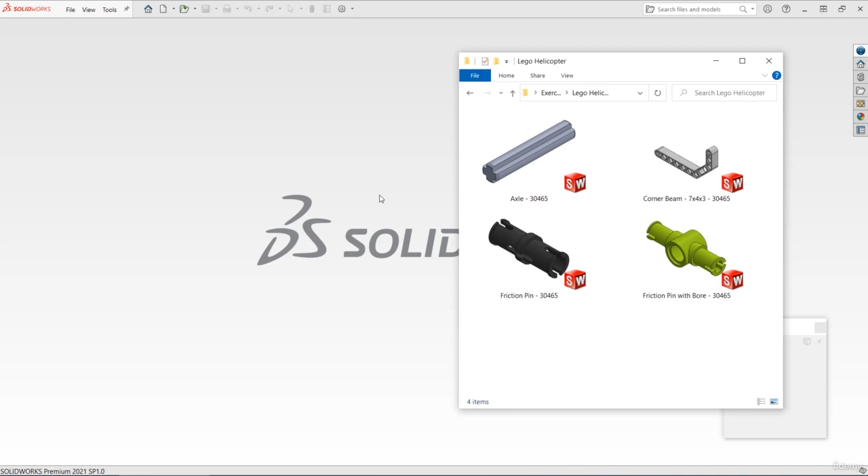Now that we've created those first 4 parts, we can use them to make an assembly of the actual Lego helicopter. The first thing we need to do is make sure we've got all 4 of those parts open. You can either drag them into SolidWorks, or open them normally. Once your parts are open, you can switch between your open windows by pressing Ctrl and Tab. So you see we've got all 4 of them open.

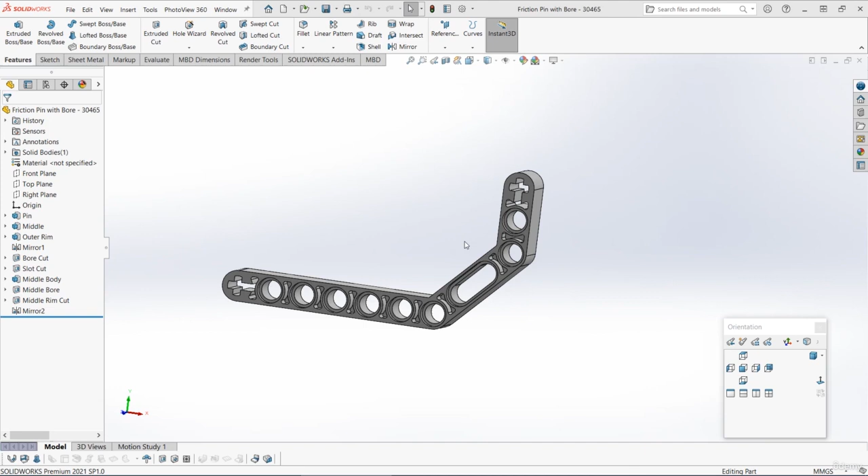Before we actually start making the assembly, we need to think about which part we're going to start with. You might think the best one to start with is this large side part of the fuselage, the large right angle beam. But if we look ahead in the instructions, we can see that this green connector is right at the center of the model, so it's probably best if we line that up with the center of the assembly. This will help us later if we need to mirror any parts over to the other side.

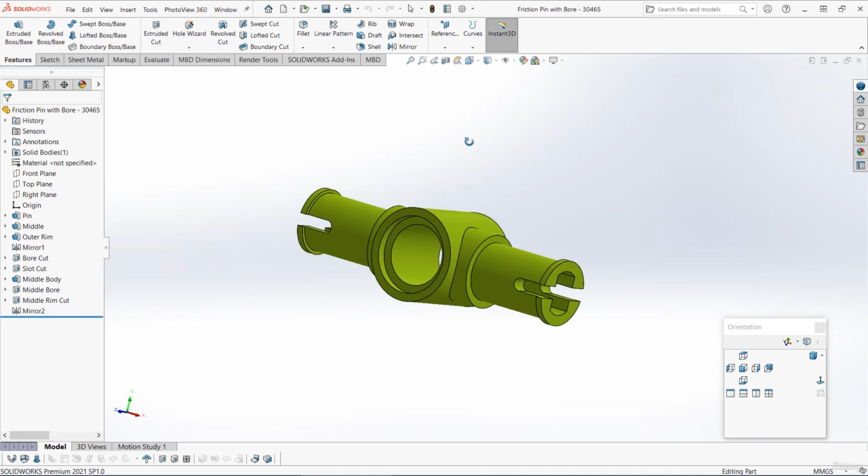So go to this green friction pin with bore part, and from within that part, go to File, Make Assembly from Part. We're now taken to an empty blank assembly, and you should see your 4 open documents here on the left. These are just parts that are open in SolidWorks.

If you don't see your parts there, you can just click Browse here at the bottom, and you can find the parts wherever they're saved on your computer.

First we need to select the part that we want, which is the friction pin with bore. Left click to select that, and then go down a little bit and select Graphics Preview here. This means that when we move the mouse into the graphics area, we'll be able to see that part following the mouse around and see where it will be positioned.

Now let's make sure the part is rotated to the correct orientation. You should see this small rotate menu, and you can use these buttons to rotate your part by 90 degrees in different directions. If you don't see that menu, scroll down a little bit and make sure you have a check mark in the box, Show Rotate Context Toolbar.

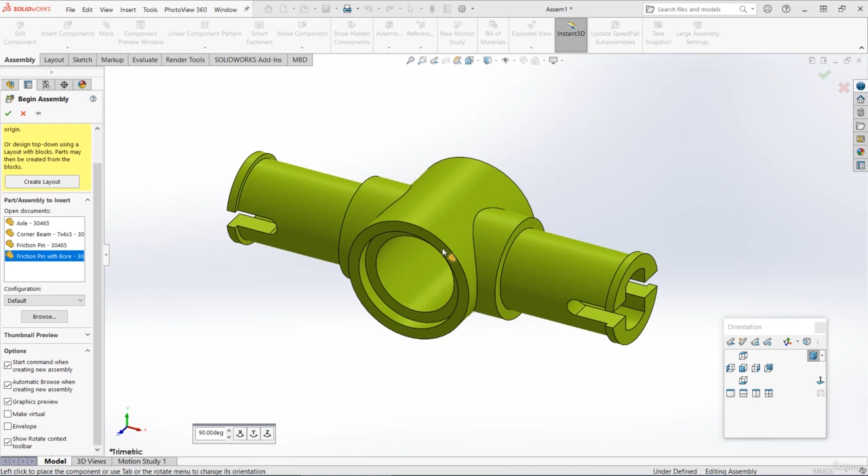Let's rotate the part around so it matches the orientation in the Lego instructions. We want this hole through the middle to be pointing directly upwards instead of forwards. So we want to rotate around the X-axis, so I'll click this X button, and now that hole is facing directly upwards. Then let's place this part anywhere in the graphics area by left clicking.

This part is now inserted into the assembly, and we can see that it's fixed because there's a small F in brackets next to the part in the parts tree. Also, if we try to drag the part around, we get a small message saying the component's fixed and it can't be moved.

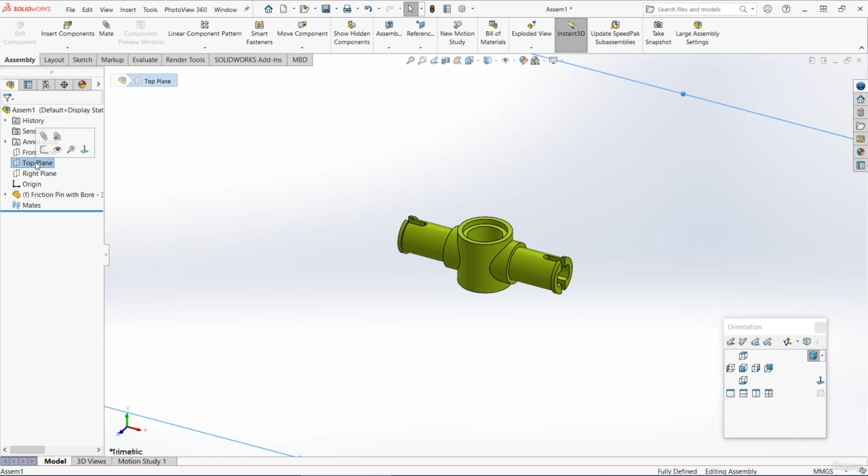However, if we go to a top view and look at the default planes, we can actually see that the right plane isn't lined up with the middle of the part. So this isn't really what we want. We need to make it so this part is free to move around, and then we can put it in the right place and fix it there.

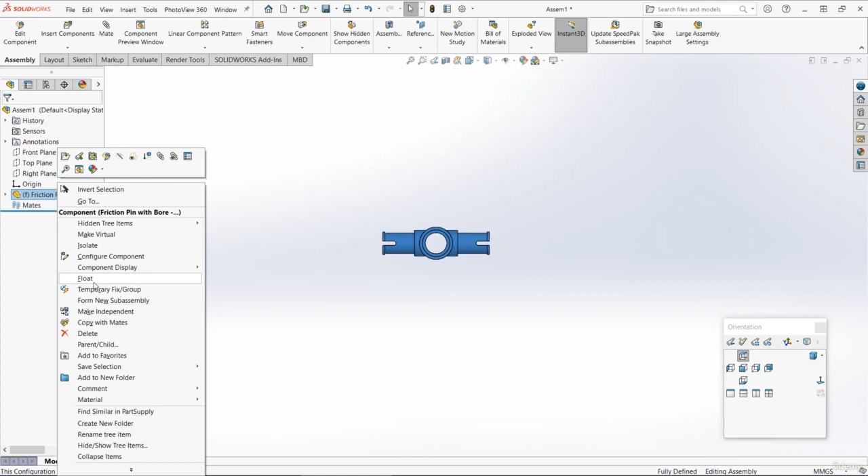To do this, first go over to the friction pin part with bore on the left and right click on the part, and from the menu choose Float. This will unfix the part so we can now move it around, and we can see that F for fixed has disappeared from next to the part name, and it's now replaced by a minus, which means the part isn't fixed. We can now expand the part and line up the planes from the part with the planes from the assembly.

Let's start off with the front plane from the part, so select the front plane, and then hover over the default planes in the assembly, and there should be one that's roughly lined up with that front plane. In my case, it's the top plane.

If we hold down Control, we can select both of those planes, the front plane from the part and the top plane from the assembly. Then if you release Control, we can add a coincident mate, and that will line those 2 planes up. Then let's choose the next one, the top plane in the part, and then hold down Control and select the

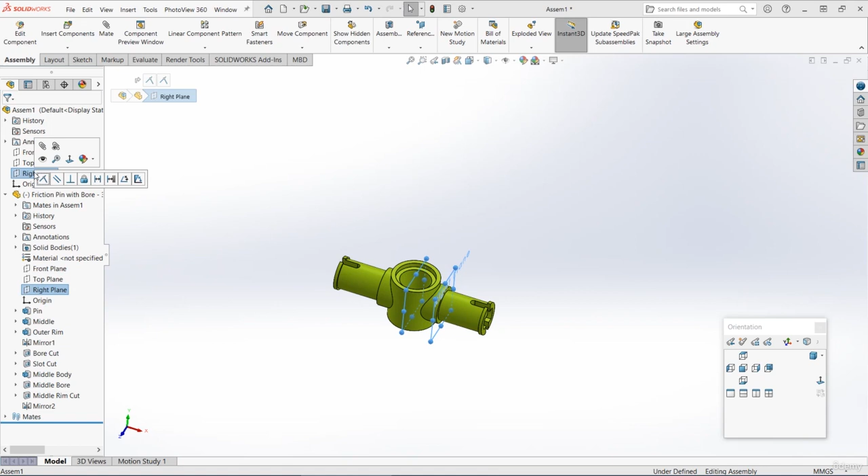front plane in the assembly, and then release Control and add another coincident mate. Finally, let's do the same with the right plane in the part and the right plane in the assembly. Now we can see that we no longer have that minus symbol next to the part name, so now it is fully defined, and we can also see it says fully defined down here on the right. And now if we go to top view, we can see we've got the right plane of the assembly at the middle of that part. So this will just make things much easier if we need to mirror over any parts from one side of

the chopper to the other side. Now that we've fixed that first part in place, let's insert the remaining 3 parts.

You can do this by going to the Assembly tab and choosing Insert Components. We can see we've got those other parts open there. Again, if you don't have them there, you can click Browse and just find them on your computer. Now before I insert the parts, I'm just going to click on this pin icon here. This just pins this menu open, so it means we don't have to reopen it every time we want to

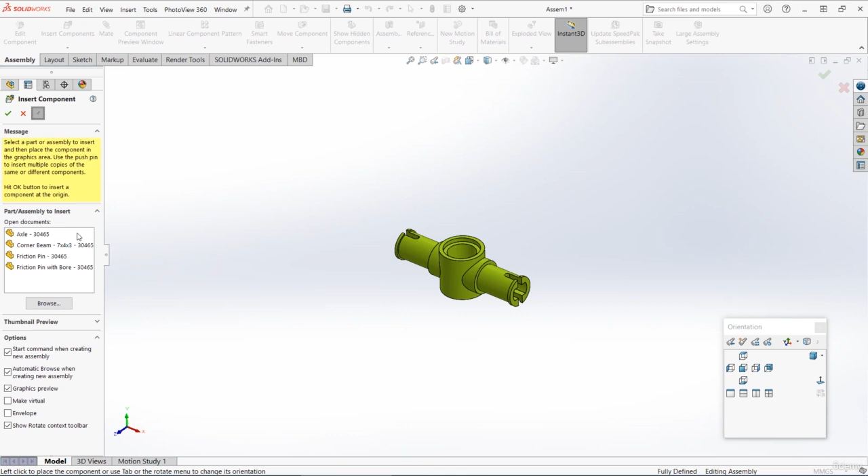insert a new part. So firstly, I'm going to insert the axle part, and I'm going to use those rotation buttons to just rotate it around to the correct orientation so it lines up with the Lego instructions, and then I'm going to left click to place it in roughly the correct position. You don't have to rotate it at this stage, it just makes things a little bit easier when we add

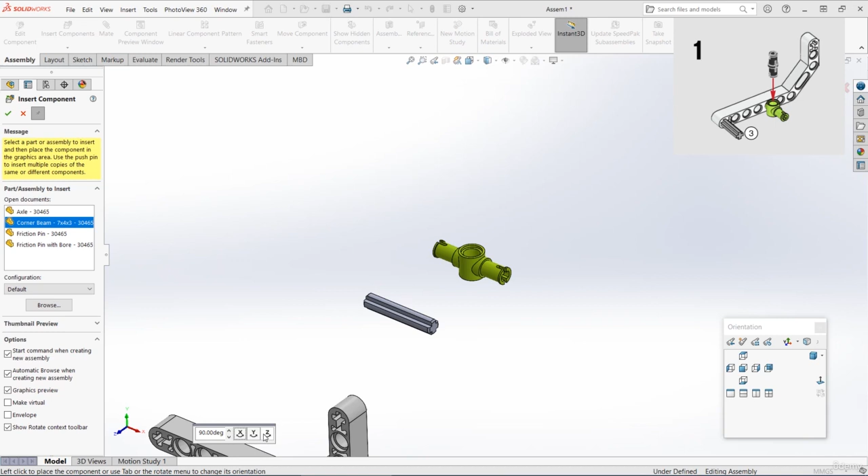the mates later on. The next part I'm going to insert is that corner beam, and again I'm going to rotate it around to the correct orientation and then place it in roughly the correct place. And then finally I'm going to add the friction pin, and again rotate it around so it's in the correct orientation. And then when you're done, you can press OK to close that Insert Components menu.

Now we can see we've got all the parts that we need in the assembly. The only one that's fixed is the green one. The other 3 parts have all got a small minus next to them in the parts tree, and that just shows that they're not defined and we can move them around in space.

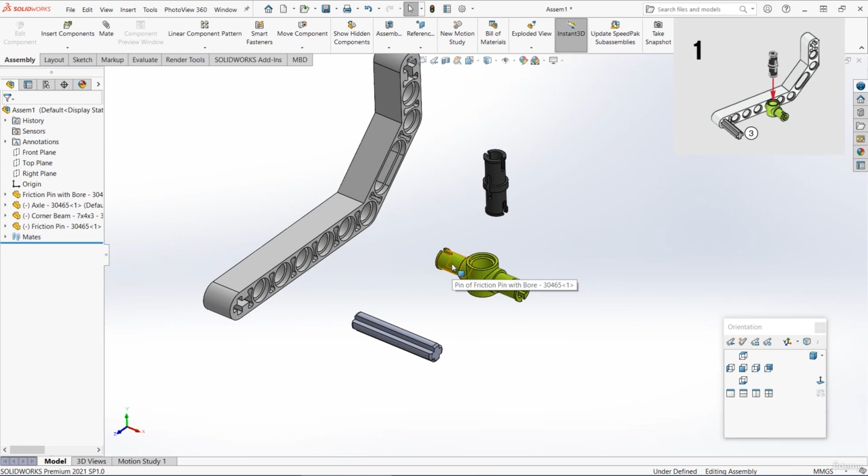Now we can start to add some mates to fully define those other parts in the assembly. With Lego, it is fairly easy to see how parts fit together, so the mates are fairly easy to add. For the first one, let's attach the beam to the center connector. All we need to do is select a circular edge of the peg on that connector, and then select a circular face or edge on the corresponding hole that goes into on the beam.

Remember, if you hold down Control, you can select these multiple items. We know from the instructions that the hole we need is the 5th one along from the front, so it should be this one. So when you have your 2 circular faces or edges selected, release Control, and then from the menu that pops up, we can add a concentric mate, which is this one with 2 circles on it.

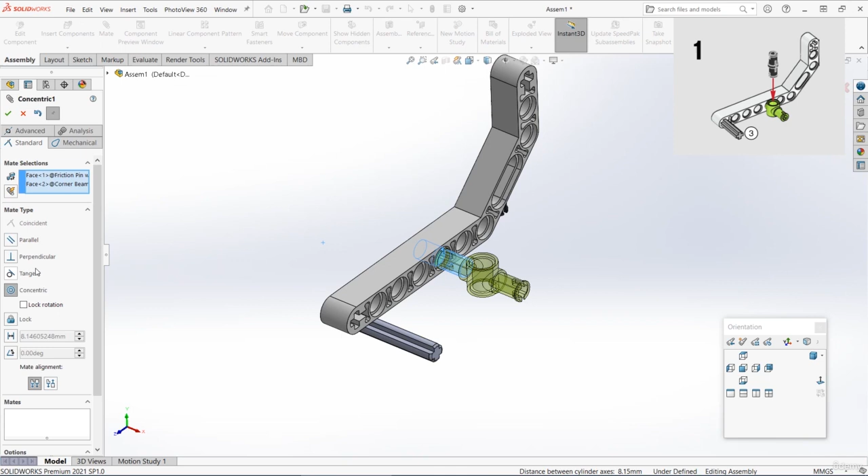If you can't see that pop up for any reason, you can also choose the mate tool up here on the assembly tab, and then you can add a concentric mate there. So now that we've added that first concentric mate, the hole in the beam is lined up with the peg on the connector, but we can still rotate the beam and we can still move it in and out. So we need to add more mates.

Firstly, let's zoom in and let's choose that flat face on top of the connector, hold down Control, and also choose a corresponding face on the beam. So I'm going to choose this large flat face on the top of the beam.

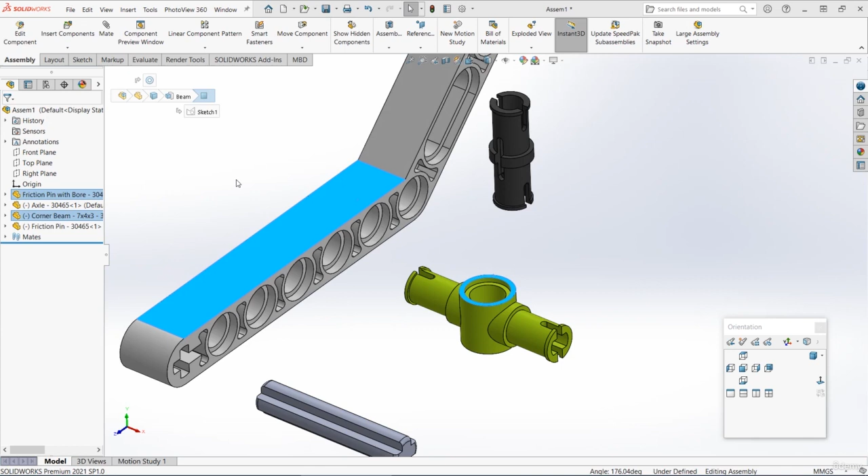I'm going to release Control, and then add a parallel mate. Then let's move the beam in to the correct distance from the connector. If we spin the assembly round, we want the outside of the connector lined up with the outside of the beam, so let's select those two sets of faces and add a coincident mate.

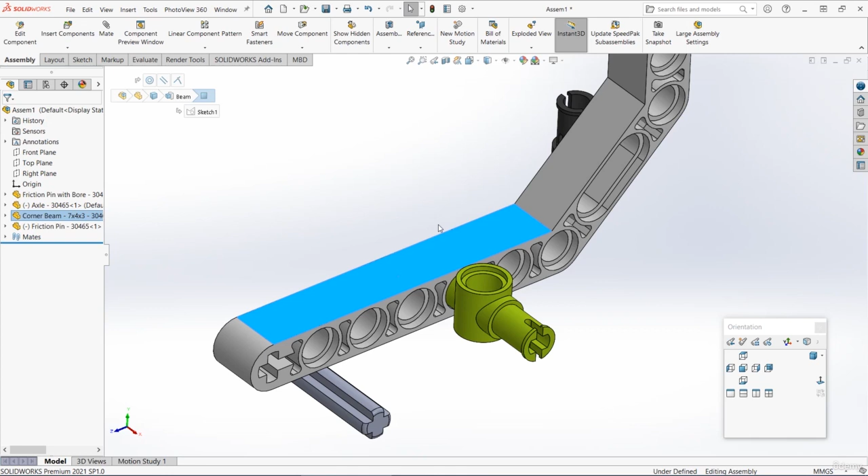Now next to the corner beam part in the parts tree, we no longer have that minus sign, which means that part is fully defined. We can also expand the mates folder at the bottom to see all of the mates we've added, in case we need to adjust or delete them for any reason.

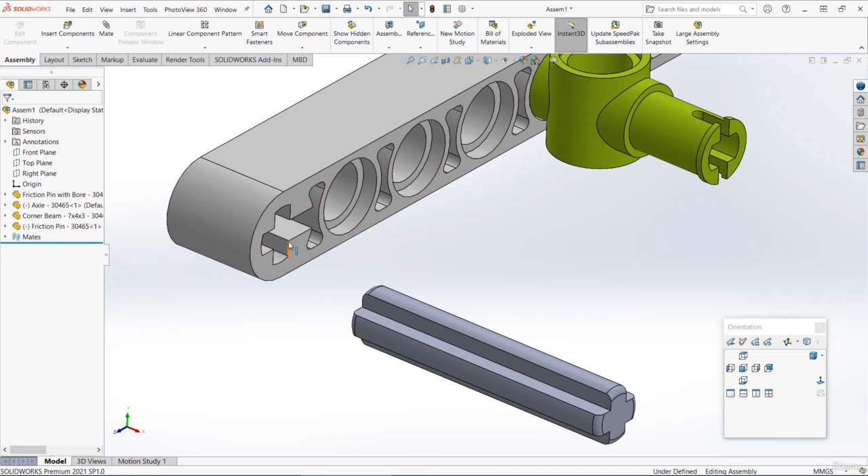Now it's just a case of adding the mates for the remaining parts. Next up, let's move on to the axle. At first glance this looks a little tricky because of the shape, but these top edges are curved, and we've also got a curved edge in the corresponding hole on the beam. So we can line those up using a concentric mate again. I'll select that curved edge on the axle, also select a curved edge on the beam, and then add a concentric mate.

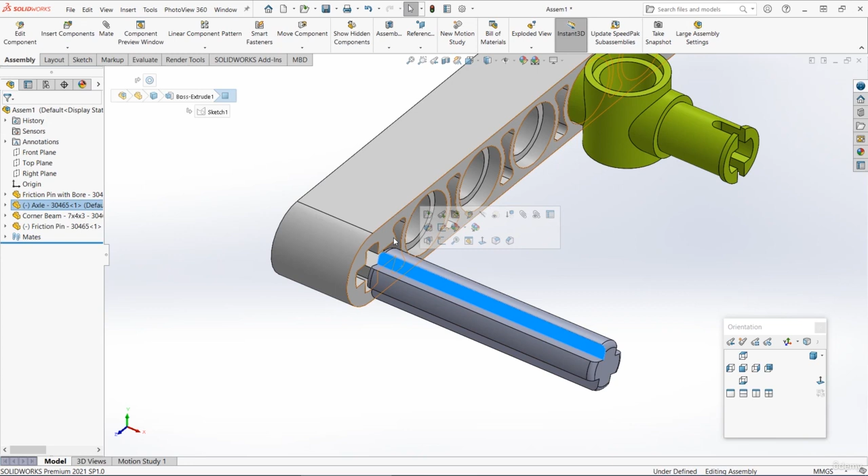Now if we move the axle around, we can see it can still spin around in the hole, and that wouldn't happen in real life, so we need to lock the rotation. We can do this by selecting one of the flat faces on the axle, then selecting a corresponding flat face on the hole in the beam, and adding a parallel mate.

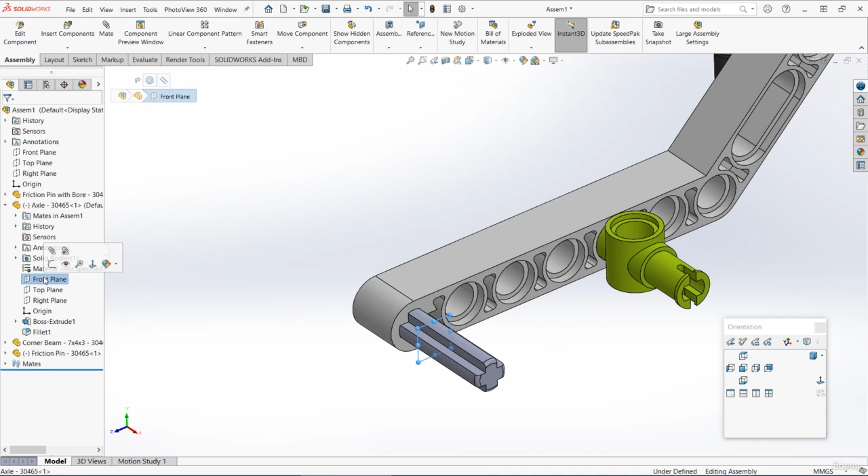In terms of the left-right position, we want the axle completely lined up in the center of the assembly. So let's expand the axle part on the left in the parts tree, and find the plane that goes down the middle of the axle - that should be the front plane. Then let's make that coincident with the corresponding plane of the assembly, which is the right plane. Now we can see the axle is fully defined and lined up in the center of the model.

Then finally, we'll add some mates to that final friction pin connector. I'm going to move it to roughly the correct place, select a circular edge on the pin, hold down Control, also select a circular edge on the hole it goes into, and add that concentric mate. Then on the bottom, I'm going to select this face on the pin and this face on the connector, and make those coincident.

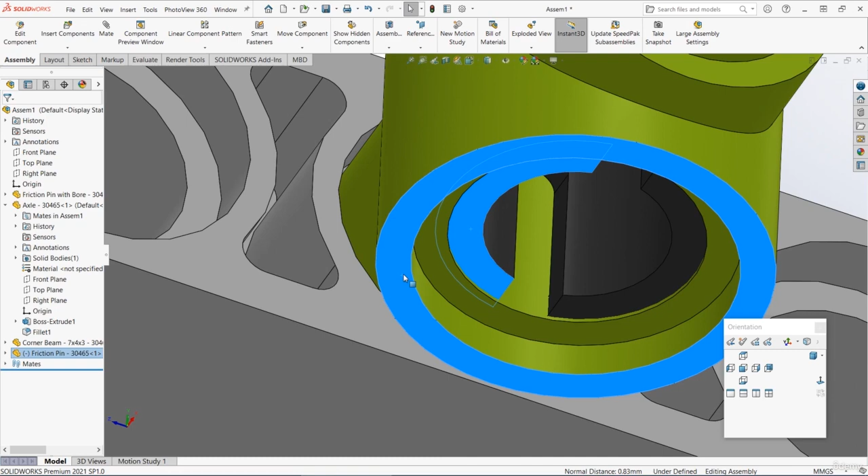Now if we look in the parts tree, we can see we've still got a minus next to that friction pin part, which means it's not fully defined. That's because we haven't locked the rotation - that pin can still spin around within the hole. This doesn't really matter within the model, but if you want to lock it in place just for completeness, you can do that easily by adding something like a parallel mate between one of the straight edges on the pin and a straight edge on the beam.

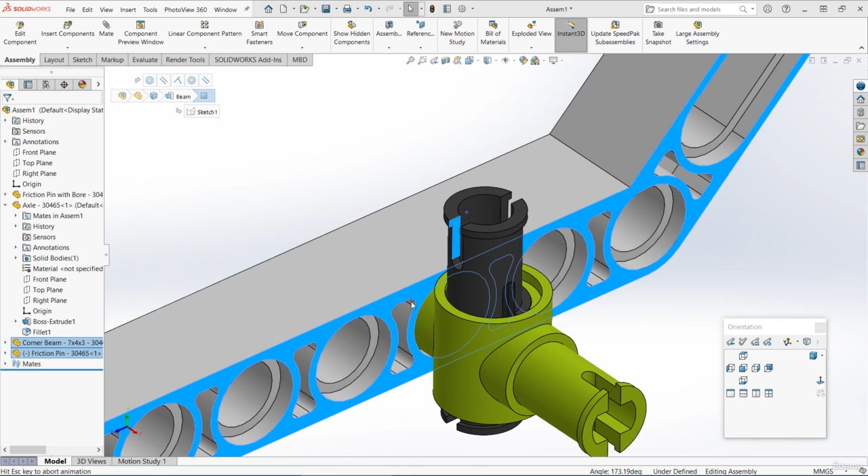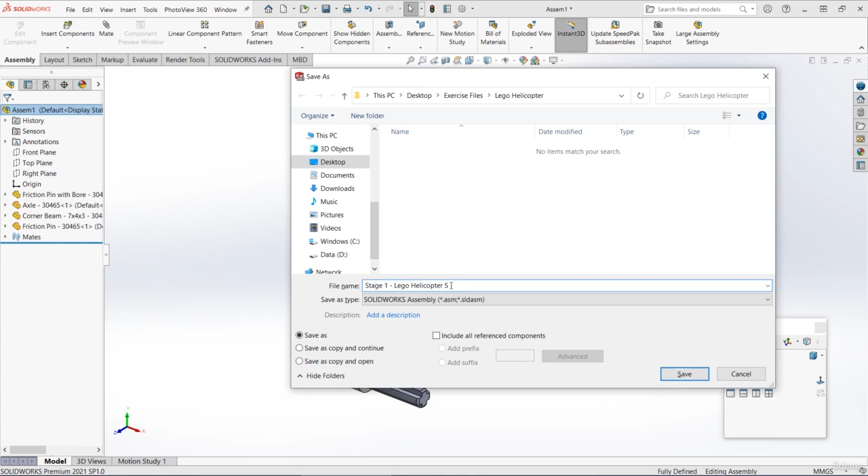Now we can see that all four of our parts are fully defined, and down here on the right it says the whole assembly is fully defined. So well done, we've completed the first stage of the Lego helicopter. At this point we can save the assembly by pressing Ctrl S or clicking the save icon. I'm going to call it something like Stage 1 Lego Helicopter, since it's the first stage of the instructions, and I'll also add that number we've added to all the other parts from the kit, 30465. So we have our assembly saved there, and we've completed the first stage.

In the next section, we'll move on to stage 2 of the instructions, and for that we'll be creating three new parts, but two of them are very similar to parts we've already created, so we should be able to make those pretty quickly.